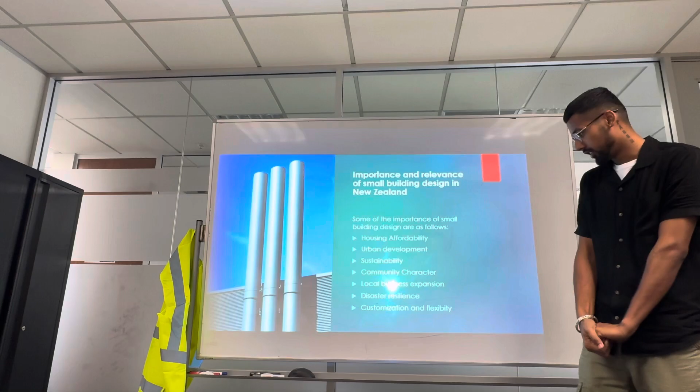Importance and relevance of small building design in New Zealand. Some of the importance of small buildings are as follows, like housing affordability, urban development, sustainability, community character, local business expansion, disaster resilience, and customization and flexibility.

Factors that affect the design process of small buildings. The first one is functionality. It defines the building's purpose and how spaces are utilized in a building, and it influences layout, room sizes, and spatial organization. It ensures the building meets the specific requirements, the functional requirements of the building and occupants.

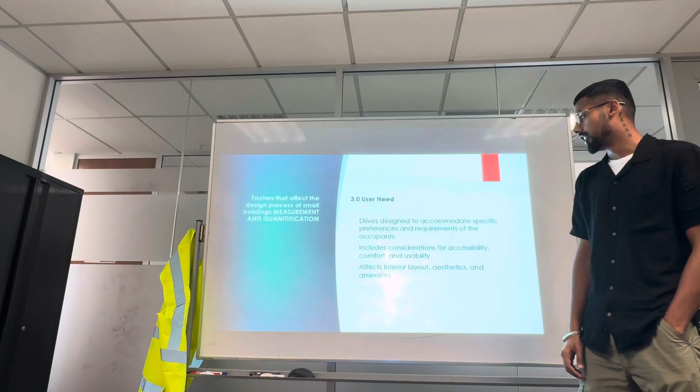And second one is sustainability. It guides the use of eco-friendly materials and energy efficient system. It impacts the design to reduce energy consumption and environmental footprints. Third one is user need. Drives designed to accommodate specific preferences and requirements of the occupants. Includes consideration for accessibility, comfort, and usability. It affects the interior layout, aesthetics, and amenities like the facilities in the buildings.

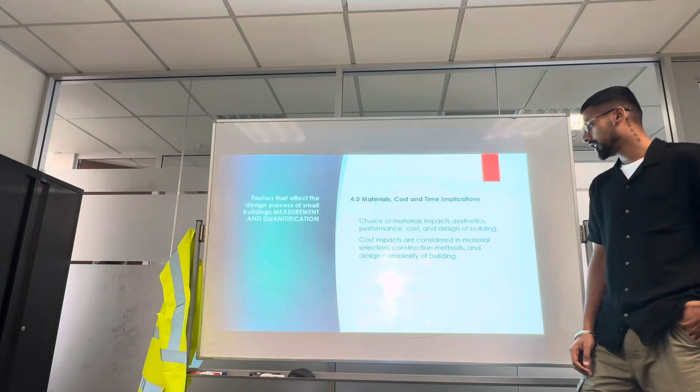And the fourth one is material cost and time implications. Choices of materials impact aesthetic performances, cost, and design of the building, like the interior and the outside material of the building. The cost impacts are considered in material selections, construction methods, and design complexity of building.

Design criteria and safety factors in assessing design, loads measurement, and quantification. Some of the design criteria and safety factors are as follows. First one is understanding building purpose and their occupancy. And second is understanding local building codes. And third one is identifying design load such as dead load or live load that the building will be subjected. And calculation of design load. And last one is applying safety factors as provided by the code during the design of the structural members of the building.

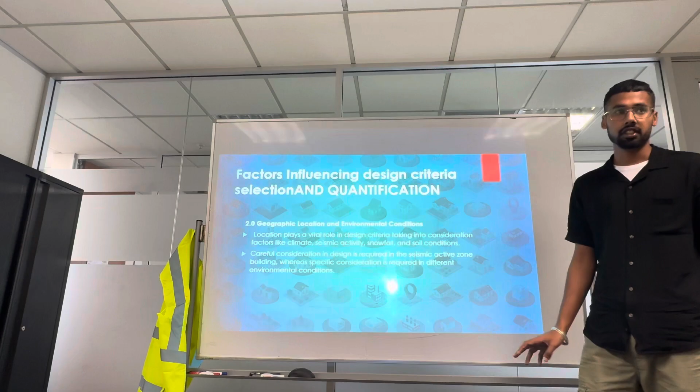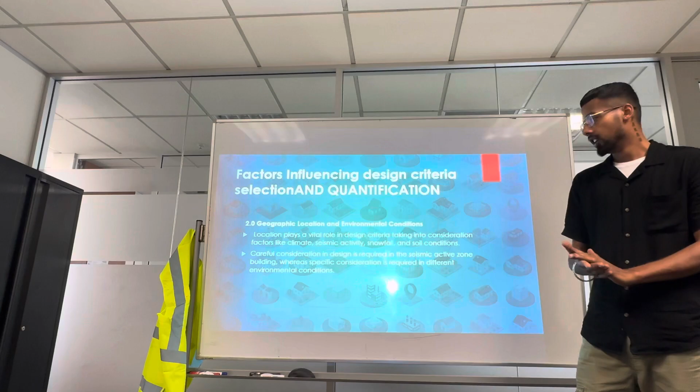Building type and intended use. The purpose and function of the building mainly influence the design criteria. Requirements and specifications are different for residential or the commercial buildings. The second is geographic locations and environmental conditions. Location plays a vital role while constructing any type of building. Taking into consideration factors like the climate of that area and assessing is there any seismic activity over there, and snowfall and soil conditions. The careful consideration in design is required in the seismic active zone buildings, whereas specific consideration is required in different environmental conditions.

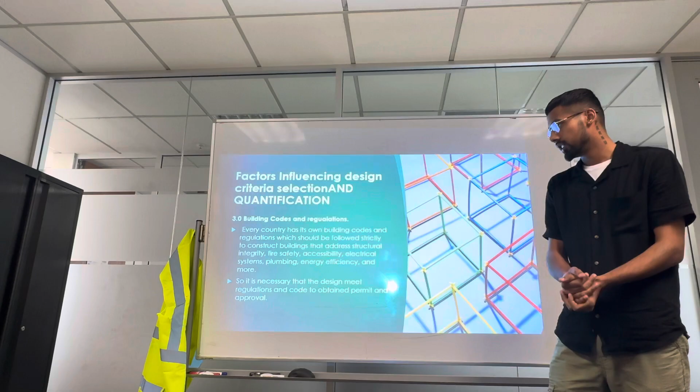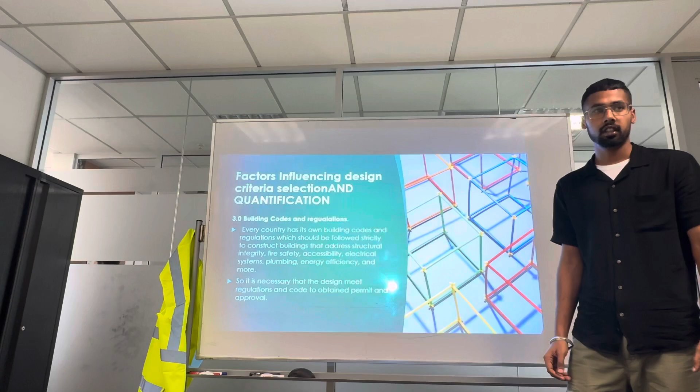Third is building code and the regulations. Every country has its own building codes and regulations which should be followed strictly to construct buildings that address structural integrity, fire safety, accessibility, electrical system, plumbing, energy efficiency, and more. So it is necessary that the designs meet regulation and codes to obtain the permits and approvals of the building. Some of the other factors are safety risks and mitigations, budget and cost constraints, sustainability and energy efficiency, client preferences, and project rules.

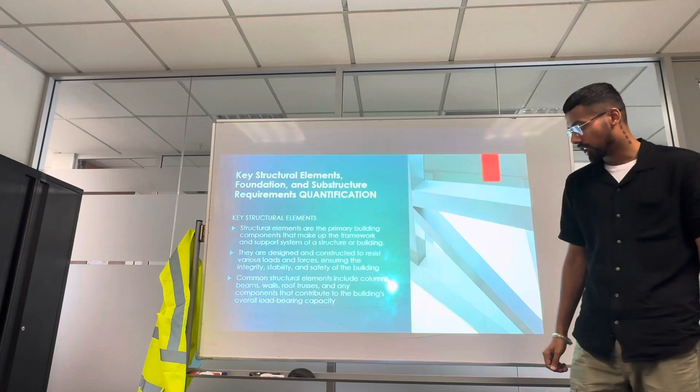Assessing the essential components of structure, the foundation and the substructure in small buildings is of paramount importance in guaranteeing the stability and safety of the buildings. These are the key structural elements of the buildings. Structural elements are the primary building components that make up the framework and support the system of structure of the building. They are designed and constructed to resist various loads and forces, ensuring the integrity, stability, and safety of the building. Common structural elements include columns, beams, walls, roof trusses, and any component that contribute to the building's overall load bearing capacity.

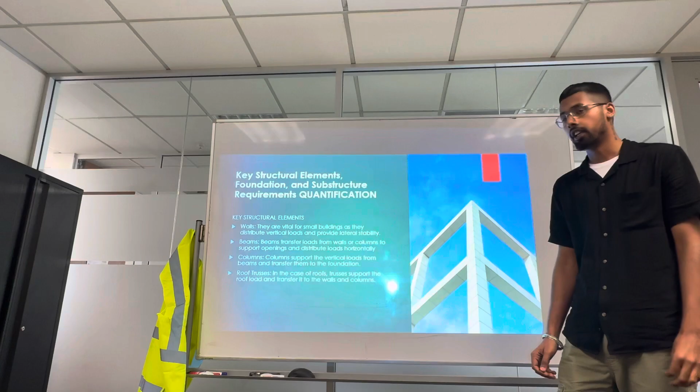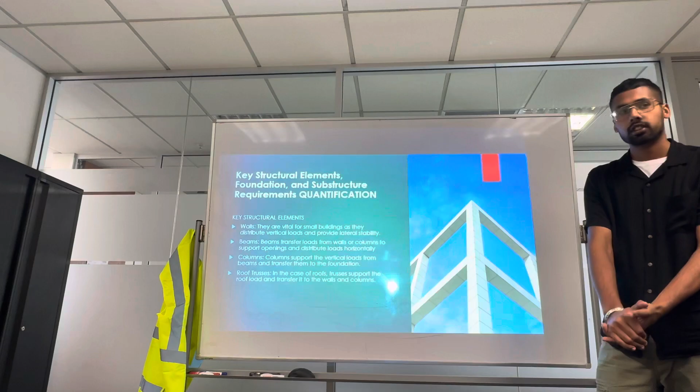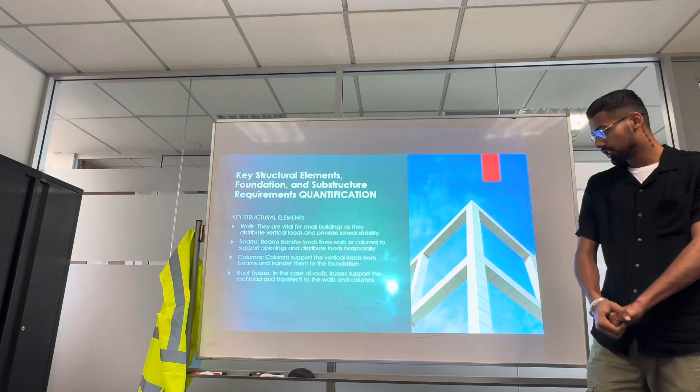There are some key structural elements, like first one is wall. They are vital for small buildings as they distribute vertical loads and provide lateral stability. Second is beam. Beams transfer loads from walls or columns to support opening and distribute loads horizontally. Third one is columns. Columns support the vertical loads from beams and transfer them to the foundation. Roof trusses. In the case of roof, trusses support the roof load and transfer to the walls and columns.

These are the foundation and the substructure of the buildings. A foundation for a small building is the structural component that serves as a base or support structure upon which the entire building rests. Foundation provides stability, prevents settling, and ensures the structural integrity of the building. The specific type and design of the foundation depends on factors like soil conditions, the size and the weight of the building, and the local building codes. Some common types of foundation are strip foundation, pad foundation, raft foundation, and the pile foundation.

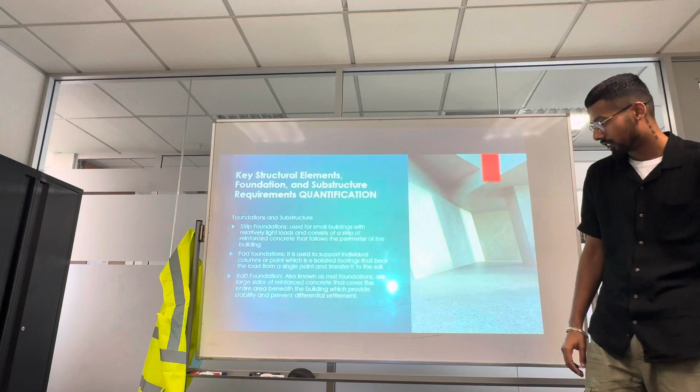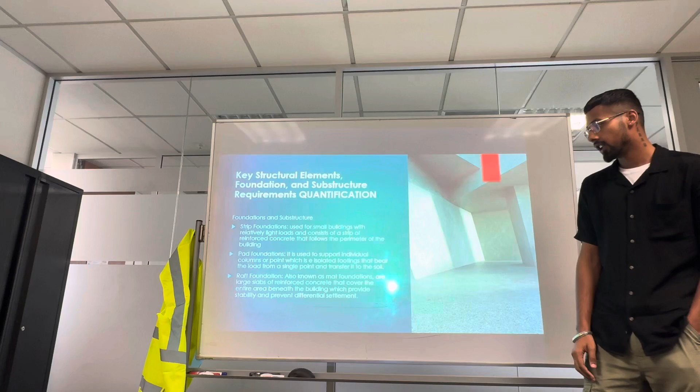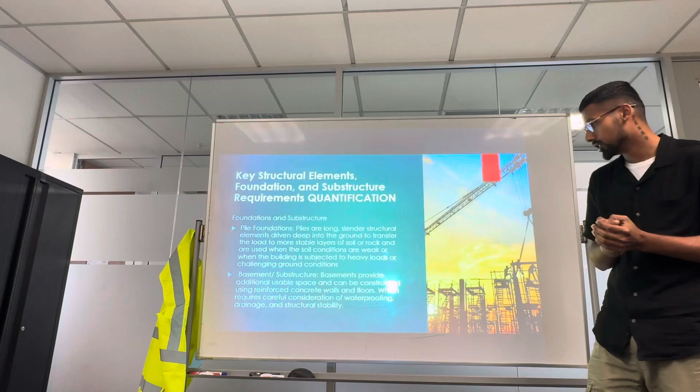Pile foundation. Piles are long, slender structural elements driven deep into the ground to transfer the load to more stable layers of soil or rocks, and are used when the soil conditions are weak or when the building is subjected to heavy loads or challenging ground conditions. Basement provides additional usable space and can be constructed using reinforced concrete walls and floors, which requires careful consideration of waterproofing, drainage, and structural stability.

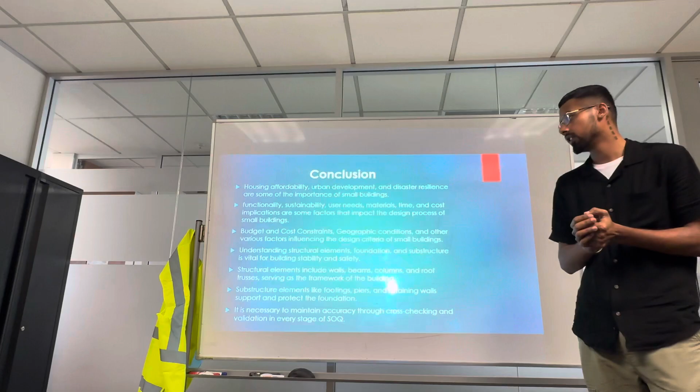Conclusion: housing affordability, urban development, and disaster resilience are some of the importance of small buildings. Functionality, sustainability, user needs, materials, time and cost implications are some factors that impact the design process of small building. Budget and cost constraints, geographic conditions and other factors influence the design criteria of small building.